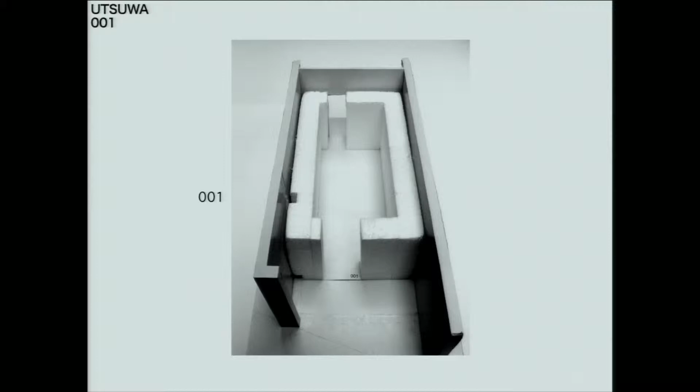As an architect, I am doing my job, and just like looking at models, I am having a bird's eye view as I do the architecture. We have been talking about biology, living organisms, and I am attempting to grow and nurture architecture as we nurture and grow living organisms. So I am designing so that things will grow.

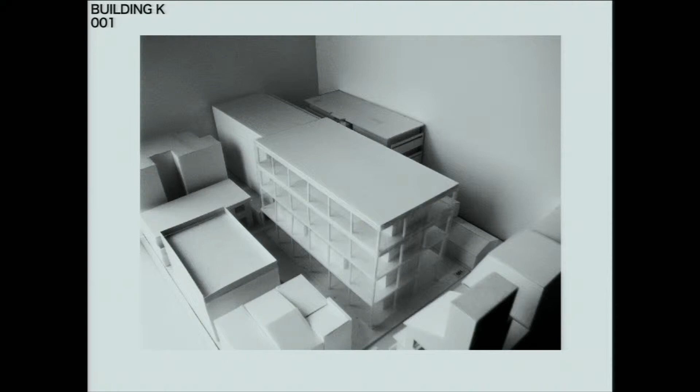This is another project, small volume, growing, and forming a bigger system.

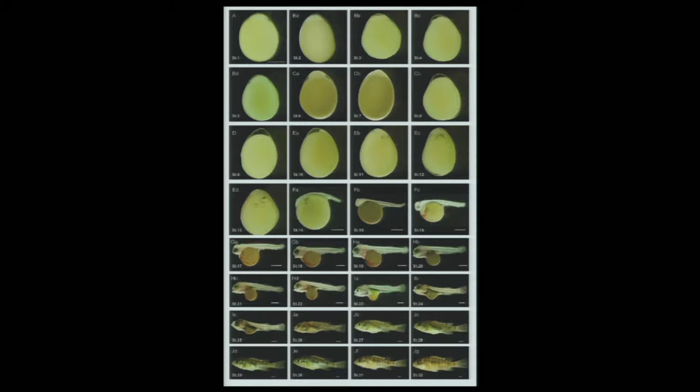So how does this relate to urban context? And I think that is where new metabolism comes in.

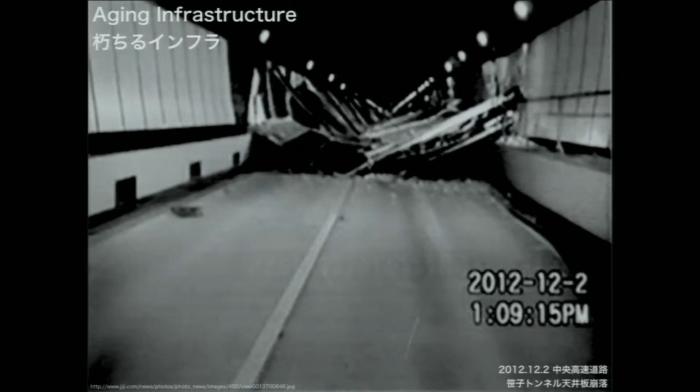So what is happening in Japan? I'd like to talk about that very briefly from the urban development point of view. Aging infrastructure, the rotting infrastructure, is what people are concerned about.

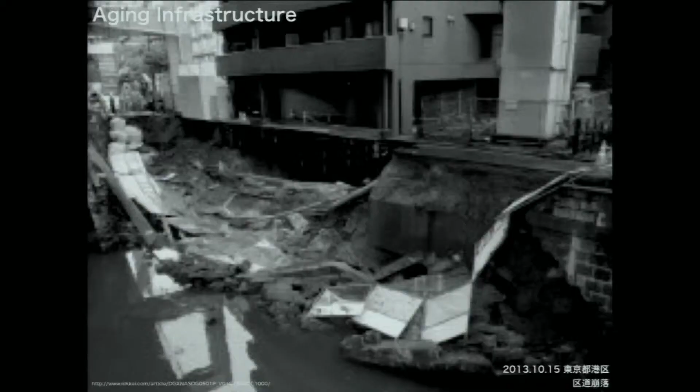Back in 2012, there was an accident of the ceiling of the tunnel on an expressway falling, and this is another example. In Minato Ward as well, the public highway caved in. So we are seeing a series of infrastructure collapsing, and this is what's called the collapsing or decaying infrastructure. This is the issue that is facing Tokyo.

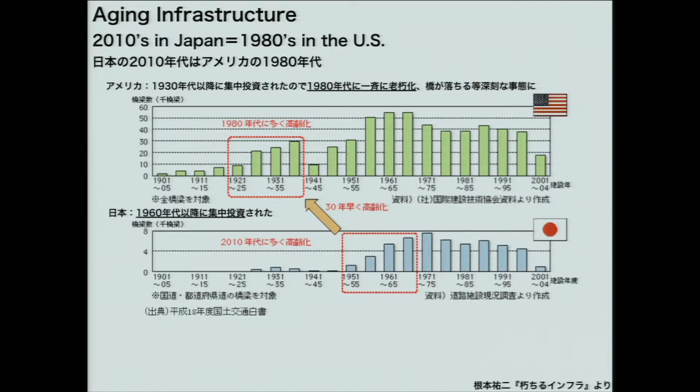Back in the U.S., this happened back in the 1980s because many of the infrastructures were built in the 1930s. In Japan, a similar concentrated infrastructure investment was made in the 1960s, 30 years after that in the U.S. Therefore, what happened in the U.S. in the 1980s is exactly what's happening in Japan this decade. We are seeing many issues associated with the aging, collapsing, and decaying of infrastructure during this decade.

In addition, Japan is faced with this issue of aging of society. In the U.S., in the suburbs of Detroit, we see the collapse and decaying, the devastation of cities. At the same time, in New York, we see the rebirth of the city as well. So we're faced with this question: which way is Tokyo going, Detroit or New York? Within this context, what is metabolism going to offer to us? Is the question.

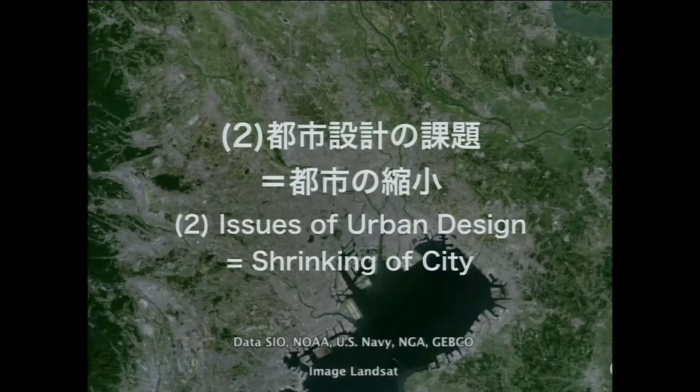I'd like to think about the issues of urban design from the perspective of shrinking the city. What do I mean by shrinking? Back in 1961, Kenzo Tange's office presented this plan, the Tokyo Plan 1960. Back then, the issue was the increased density, the overcrowding, so he proposed that linear developments be pursued instead of radial ones.

Whereas what's happening in Tokyo today is on the suburbs of Tokyo, we do see the aging of infrastructure, aging of society, as well as hollowing out. Part of that is being addressed in my personal project in Tsurugashima in Saitama Prefecture.

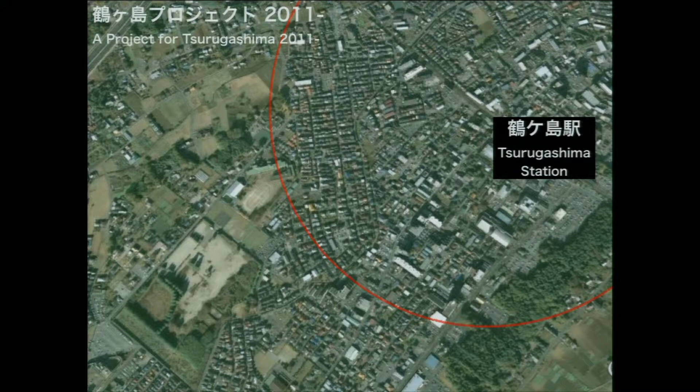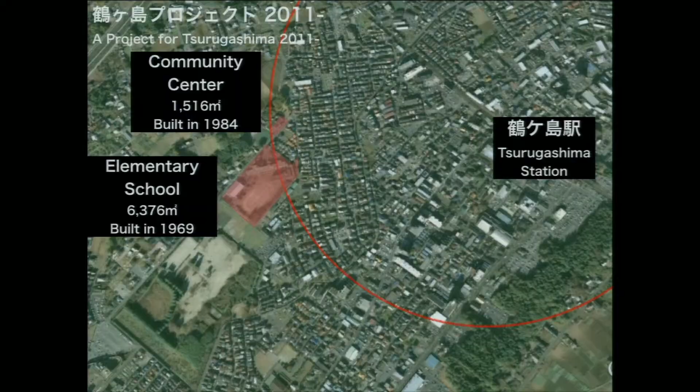Tsurugashima was developed back in the 1960s as the bed town of Tokyo. This red area is about 20 minutes walk from a train station. Many of the residential buildings were built, as well as universities and others. Elementary schools and community centers were built very rapidly during that time, and these buildings are faced with aging issues. So how are we to address this?

Of course, we have to keep in mind that the financial aspect is very gloomy. On the left-hand side, you can see the public building construction expenses. This is a public expenditure. On the right-hand side, you can see the Social Security expenses.

Back in the 1990s, the amount was 4 billion versus 0.6 billion, whereas in 2004 they became on par, 1.9 billion each, and in 2011 the order was reversed. The public buildings expenditure was 1.2, whereas Social Security expenses increased to 3.9 billion. In other words, Social Security for long-term care and medical care expenses are far greater than public building construction-related expenses today.

So in Tsurugashima today, it is almost impossible to build new public buildings. They can only renovate and repair should there be a leak, for instance. So that's one of the issues faced in Tokyo today, and what we did in our project was address how to globally reduce the amount of infrastructure in a collective manner.

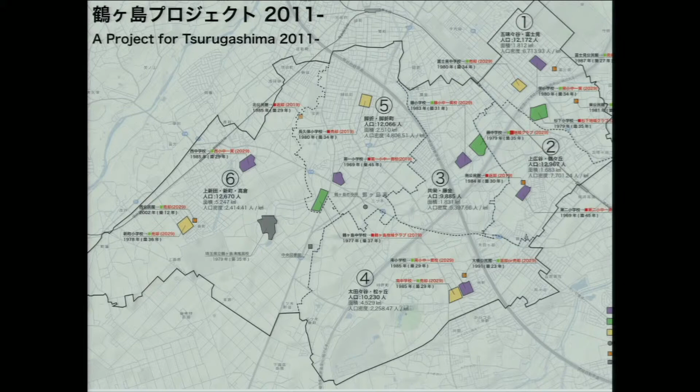We have plotted the public buildings in Tsurugashima. In certain sections, we will be scrapping or closing the schools, public schools, and in others we'll renovate them. Here you can see the ages of different buildings.

Older ones are 40, 50 years old, younger ones about 20 years old. The durability of concrete is taken into consideration, and we had to ask ourselves which one are we going to scrap, which one we are going to renovate or replace. So buildings are not forever. There are physical limits and physical durability, and that is the physical condition that binds Japanese cities today.

But, of course, for the consolidation or scrapping of these public buildings, these will entail political conflict of interest.

Only 1/3 of the floor space and 1/3 of the roads could be maintained, according to the calculations based on the available fund in Tsurugashima.

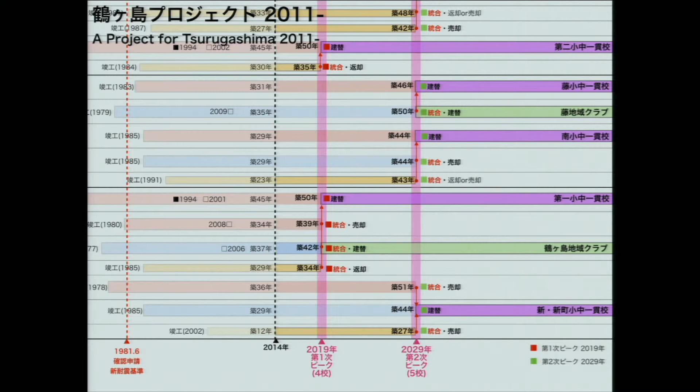So what are we going to do? By 2019, the renovation peak is going to arrive, so it was imminent that they addressed this. This was a big political issue for the coming 5-10 years.

So we have a studio in our university, Toyo University, and students were asked to make proposals with this shrinking, the need for shrinkage, in mind. We have been looking at the directions to pursue.

This is what is referred to as a public meeting, where we get the community people together to ask for their feedback and to exchange opinions.

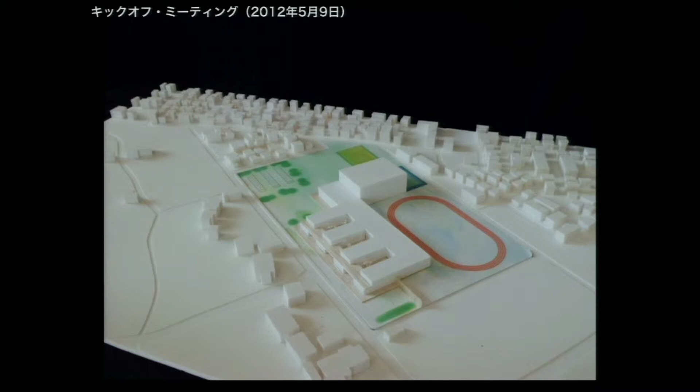Actual models of the buildings are made, and like seeds, they're placed. A simple model is made, and the votes are taken, and after 2 weeks, we bring some more.

So step by step, we try to get a consensus, and we try to look at what the shape of the infrastructure should be like. Those are a series of workshops, and gradually it became more complete.

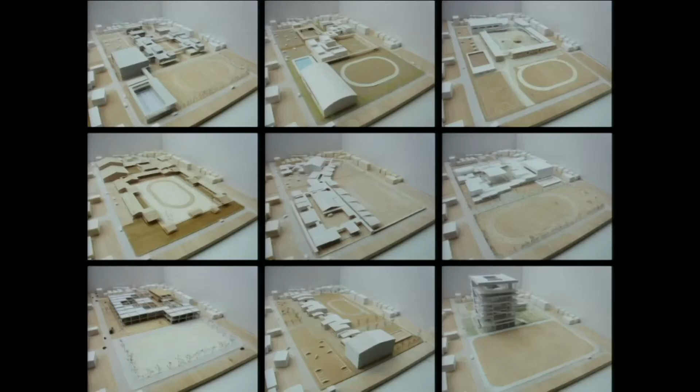And so when rebuilding, the shape of the facilities were considered. By repeating this process, gradually, consensus among the citizens and understanding of the citizens can be obtained.

Before voting, the residents confirm with the designers about the intentions of the design. Then a referendum is made, and based on the voting results, the options are narrowed down.

Benjamin Sun's presentation talked about the use of genetic algorithms to generate architecture and then to use an evaluation algorithm. That process was introduced. Likewise, here we have a very biological process of generation and elimination to narrow down the options.

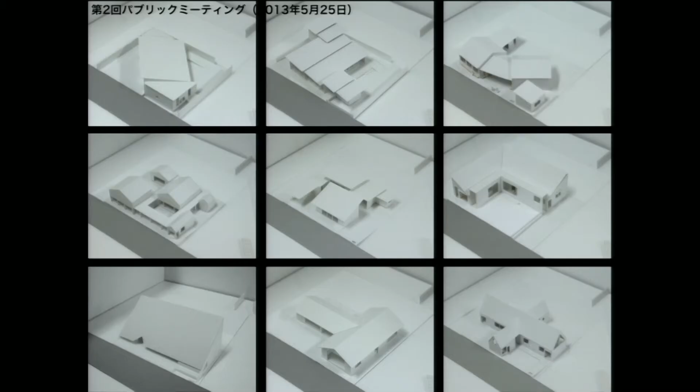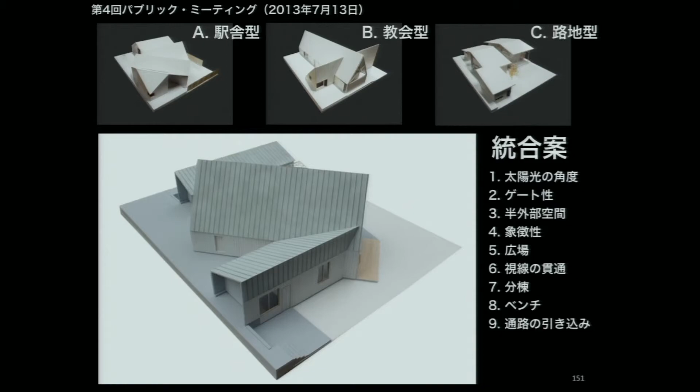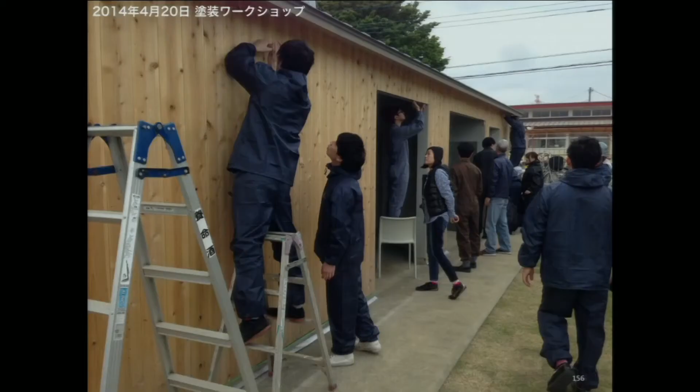As we try to shrink down into suburban areas for public buildings, concrete buildings will be consolidated into a few locations, whereas within the community, there are going to be smaller wooden structure buildings spread around. That's the thinking here. And as for those facilities, it will not be left up to the administration, but it would be managed by the community.

In regard to the reality that surrounds us, how does new metabolism get involved? The following is my proposal in this regard. If you look at the capsule tower of Kurokawa, this was created in 1972.

And among the buildings that were made around this time, these are being rebuilt or renovated, and a lot of decisions have to be made now about this. For example, the Wangan Tower condominiums will have to be refurbished or will have to be rebuilt. So how should we perceive this?

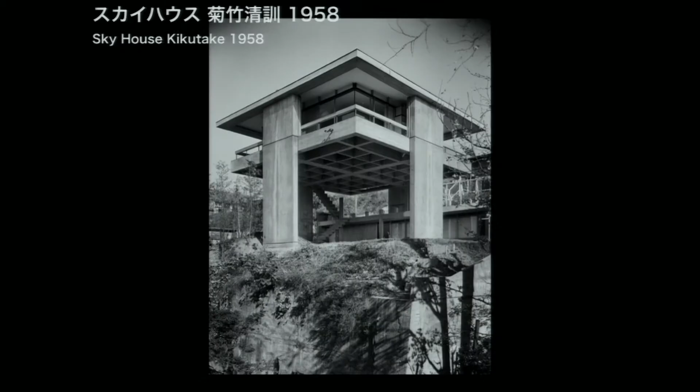What we must remember is that among the metabolist proposals for scaling up, there are ideas, but there's also various proposals for scaling down. This is the Sky House work of Kiyonori Kikutake, and inside there are children's rooms that were planned, referred to as move nets, children's rooms hung from above.

As Kikutake-san's children grew up, these move nets were removed. So it's not just about scaling up, but also, depending on the changes, it's necessary to be able to scale down. This kind of metabolism concept was applied, and it's possible to interpret the approach this way.

So when we talk about the new metabolism, one thing we have to think about is that there's the extension of the metabolism of the 1960s, looking at it as aging metabolism. So we should look at this as a continuity of metabolisms. And when it comes to an aging metabolism, for example, there's the Nakagin Capsule Tower.

Instead of regarding this as a failure to realize a capsule, depending on how the consensus is achieved, it may be possible that the replacement of capsules can be carried out. So the time has come whereby it's necessary to debate about what to do about these buildings. It would be more appropriate that way.